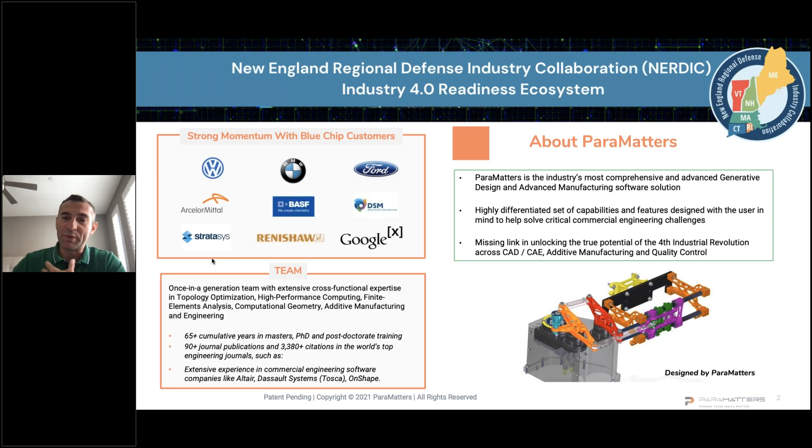And we really think that we bring the most comprehensive generative design solution on the market today. Just a few case studies on how our customers could leverage this technology: first of all, significant weight reduction, significant reduction of design cycles and time to market. And you can see that the technology allows generating lightweighted designs for nearly any material — it can be polymers, it can be metals, and various material properties.

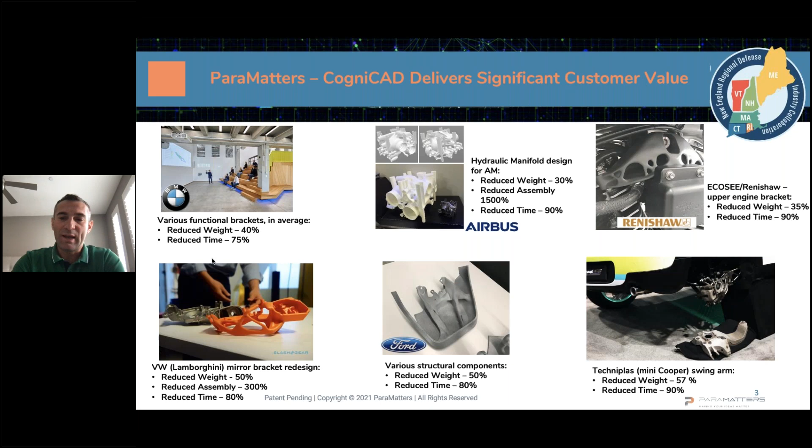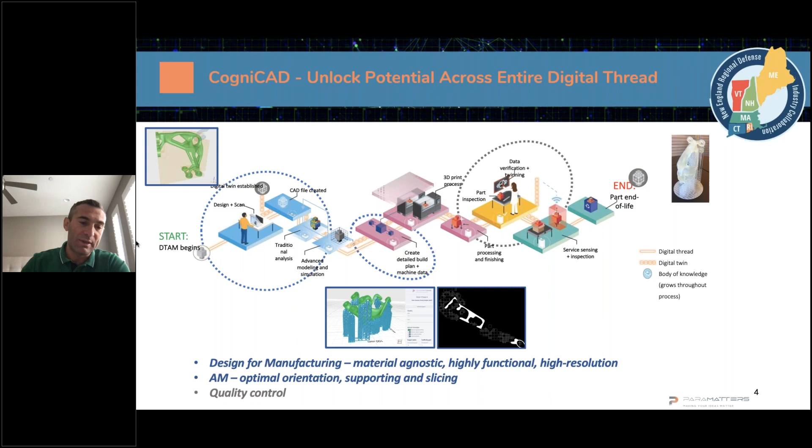Having the design, we need to prepare the design for manufacturing, meaning, depending on the technology, to find how to optimally orient the part, to generate support structures if needed, and to slice the model before sending it to manufacturing. Hence, instead of traditional CAD/CAM, we have stages of design for additive and preparation of the model for additive. And after the printing, the inspection part is also extremely important. In this presentation, I will mostly focus on the first stage, design for additive, and show what we can do, as well as our company's offering for preparation of the model for additive.

So now let's talk about generative design, what we are talking about today. What is design, right? In Wikipedia, if we look at the term 'industrial design,' it's basically creating part form prior to manufacturing. And if we talk about industrial functional design, especially for high performance parts, we need to make sure that this part is also physically viable — in engineering terms, physically viable. We also need to be sure that in terms of finite element analysis, the part can be viable.

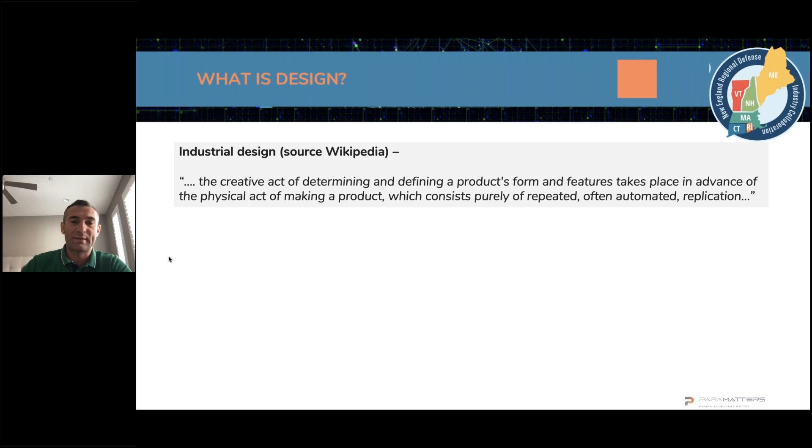And if we go to industry today — automotive, aerospace, defense, whatever industrial sector — and see how the engineering design cycle is built, typically two engineers are involved. The first one is what we call the CAD engineer, who is creating shapes based mostly on his intuition, using some CAD modeling.

And then he transfers this shape that he created based on his intuition, sending it to a finite element analyst, who has to mesh the model, apply loads, define material properties, and check, in terms of virtual physical tests, that the part doesn't break, right? We have to be sure that deformation, stresses, frequencies, and so on don't exceed the maximum limitation. Now, the design itself is done using CAD modeling, and CAD modeling is a lot of tedious operations based on primitives in CAD.

So we have to create a shape iteratively, then give it to analysts, and in many cases there is an iterative cycle of changing shape and analysis, and as a result, the design cycle is pretty long. It can take between 1 to 2 weeks for simple parts, up to months for complex design projects. And the process is very iterative, labor intensive, and also human centric. If we give the same design challenge to another team of engineers, they will probably come up with a slightly different design.

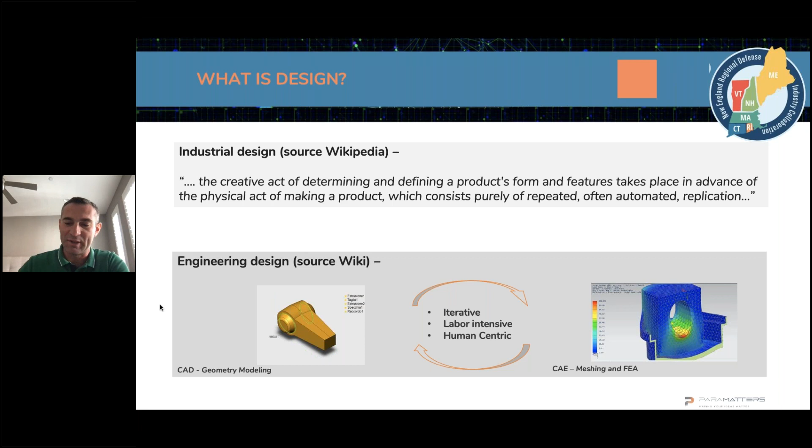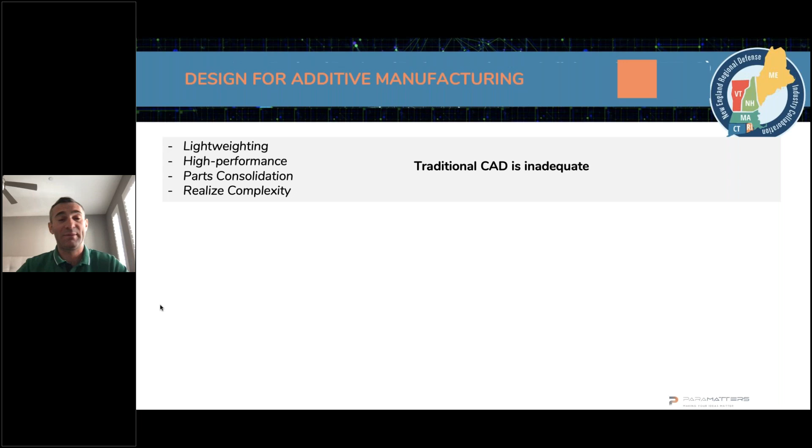What is generative design all about? In many cases, when we talk about generative design, it's related to additive, but not only. It can also be applied to traditional manufacturing. But for additive manufacturing, we need to understand that printing a design which was designed for traditional manufacturing doesn't make much sense. We need to leverage all the additive manufacturing advancements. Hence, we are able to consolidate parts, realize a lot of complexity, and generate much higher performance parts, and probably also lightweight.

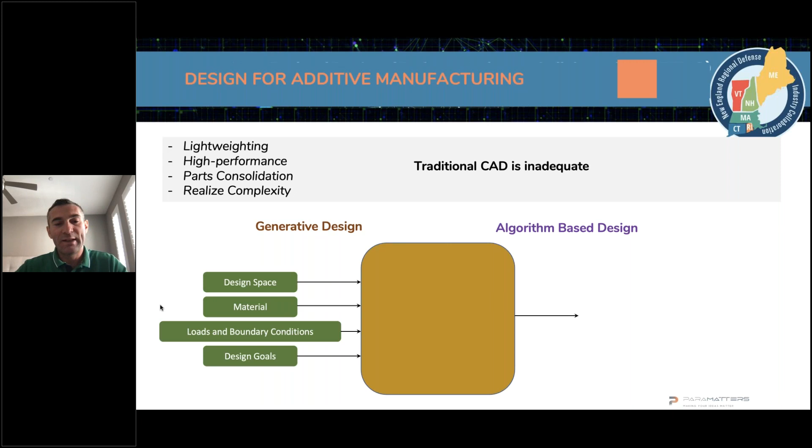And the technology behind it is what is called generative design. There are various definitions of what generative design really is. My personal definition is that it's algorithm-based design. We need to generate smart algorithms which can take into account all the constraints, so we are able to create viable geometry which can be manufactured and satisfies all physical constraints. Schematically: we need to define a working environment, what we call design space. Since the shape generation is based on physics, we also need to apply material properties, load boundary conditions, and design goals. And the algorithm should be able to generate a ready-to-manufacture model. That would be the ideal situation, right?

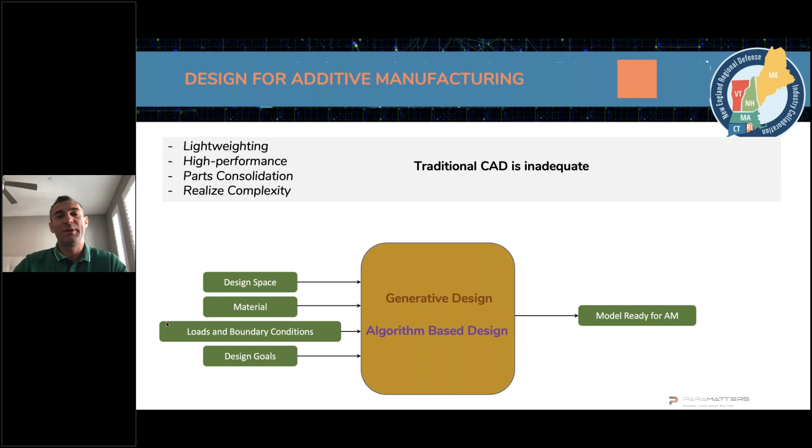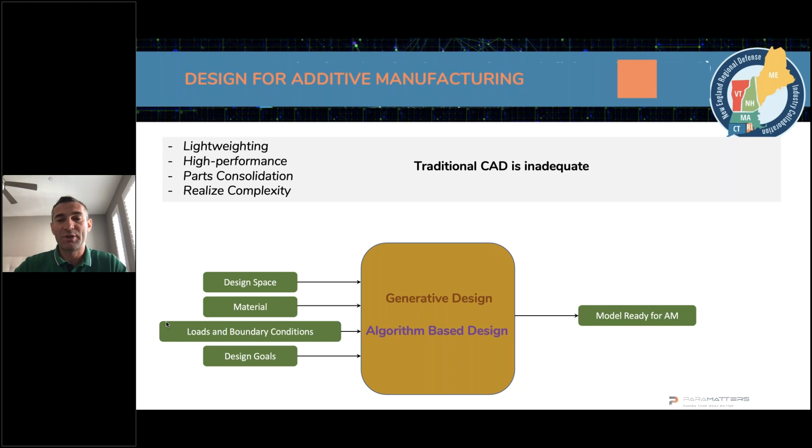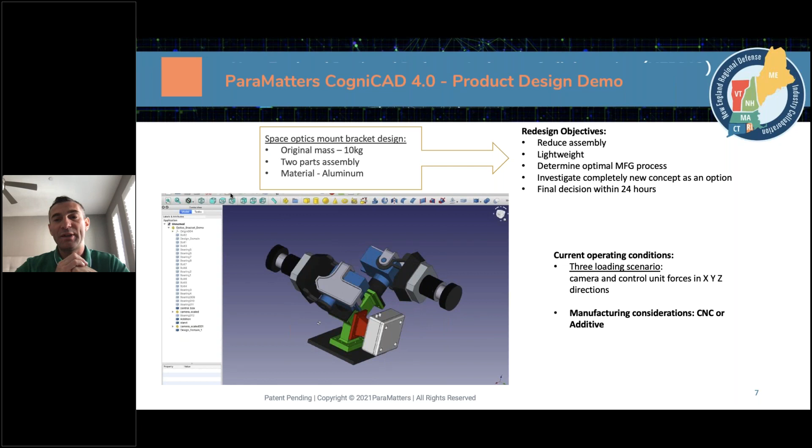And we talked about Industry 4.0, it's all about automation. We would like to automate these design processes as much as possible, to have as little manual, human interruption in the process as possible. I have an example here of a traditionally designed bracket. If we want to leverage additive, we can, for example, consolidate these 2 parts and consider this blue part as a design space. We define material properties here as aluminum. We defined loading conditions and manufacturing constraints as CNC milling and also as additive manufacturing.

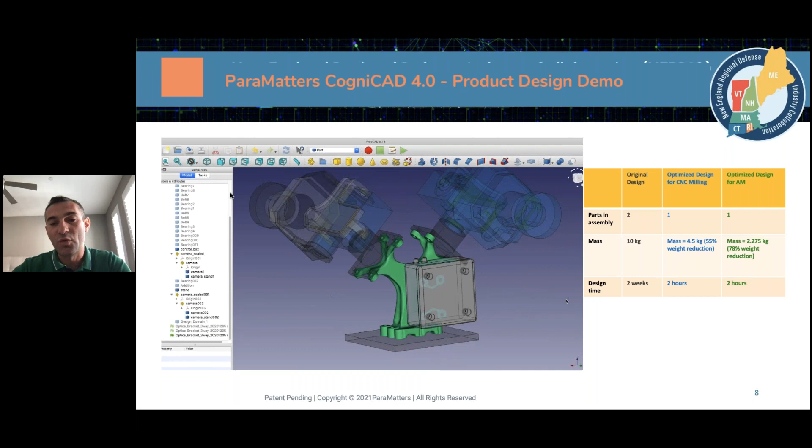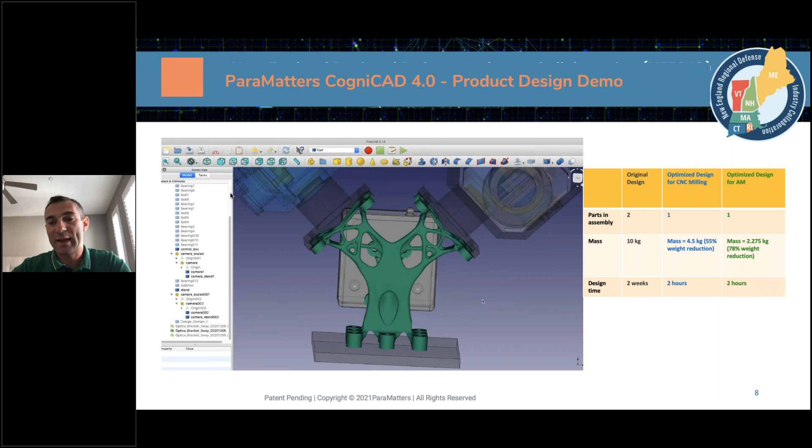And you see an example of how the software was able to fully automatically generate a design like this for CNC milling, and what you see now is for additive manufacturing. Of course, the part is much more complex, but we can achieve significant lightweighting and also assembly reduction, which also impacts the supply chain and overall manufacturing. So let's zoom in now on what generative design really is, how it works, and how we design problems.

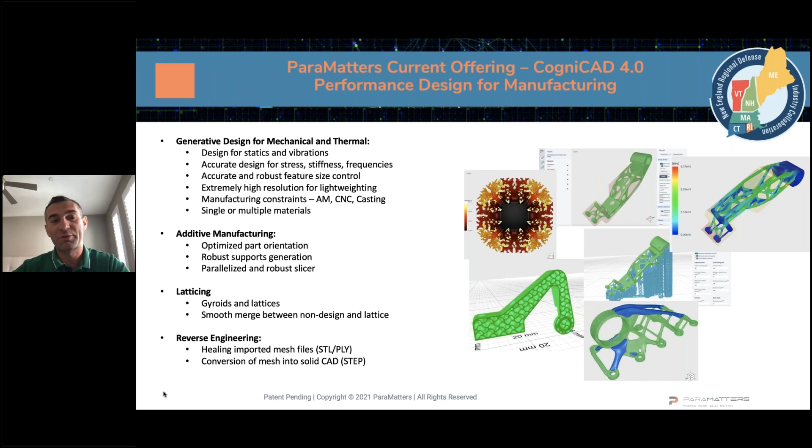Currently, our solution from ParaMatters, the company where we develop it, can take static and vibration problems into account. So beyond simple static loads, we can also take frequencies into account and control stresses, deformations, and stiffnesses in order to ensure very accurate manufacturing capabilities. We need to control feature sizes and also consider manufacturing technologies. Imagine how complex it is to create algorithms which take all of this into account. From here I would like to jump into the software and show generally how the flow works.

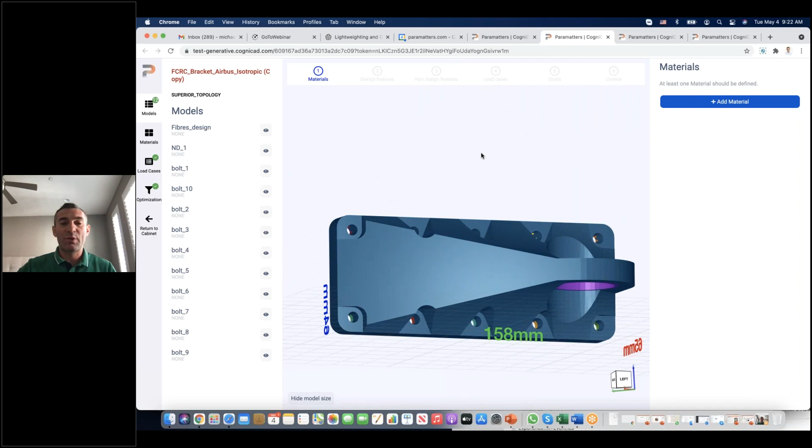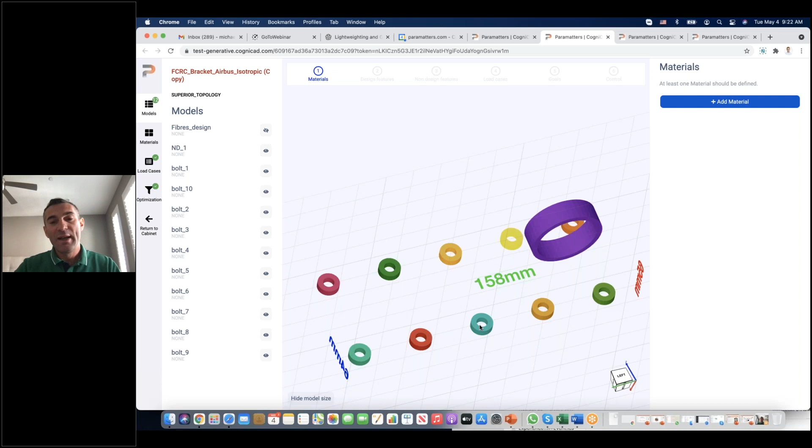What I'm showing is our software and how it looks in the GUI. Imagine we want to design a bracket like this. Actually, it's an Airbus bracket, and of course we want to lightweight it. So this is what we call the available design space. When designing this part, we need to keep some areas preserved, untouched. Each part that we design is part of the global assembly, and we need to make sure that interfaces stay intact and don't change. So ball bearing areas, some shafts or other areas should be preserved. What we basically ask from users is to create this design space in CAD and import this assembly into our platform.

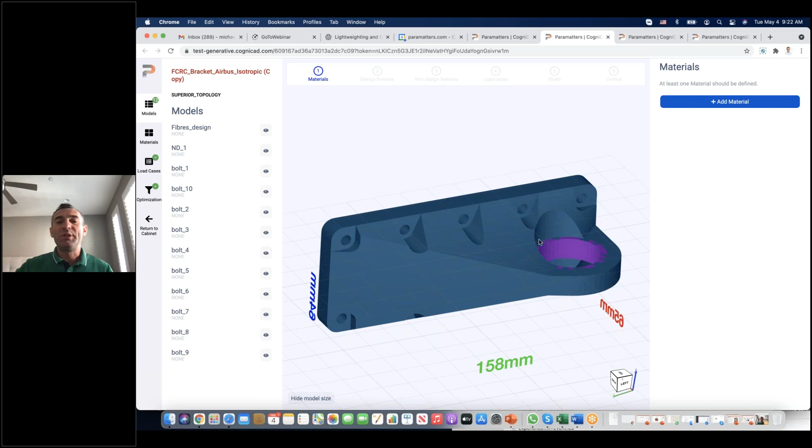So once you import this assembly into our platform, the flow is quite intuitive and easy to use. We also wanted to create this flow to be as intuitive as possible. So let's go together and try to define a problem. First, we have to define material properties. Let's assume this is aluminum, and we have material properties. If some material doesn't meet the user's expectation, you can always manually edit material properties.

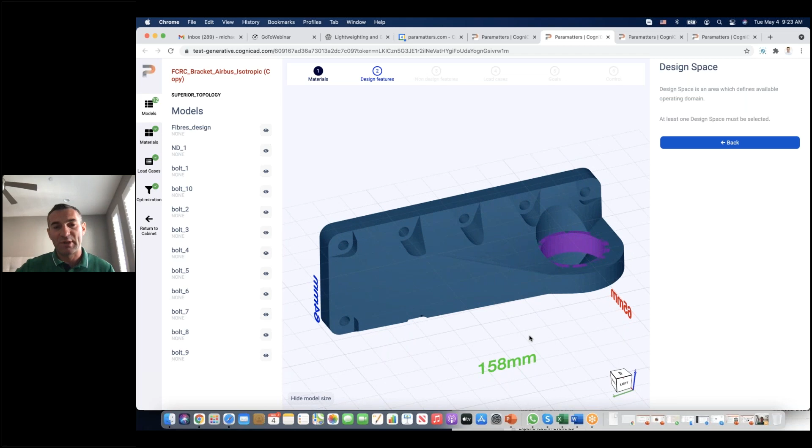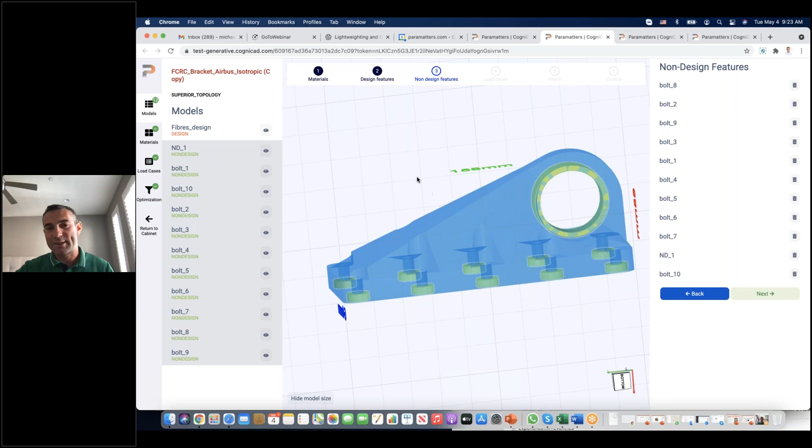Then, in the assembly that we imported, we need to classify, to tell the algorithm what is the design space, right? So this is our design space, and what we call non-design features: the areas that should be preserved untouched by the algorithm. So basically everything which we define as non-design will be intact, unchanged, and the design should be created within the design space area. It cannot exceed the other areas. So these are the constraints of the design problem.

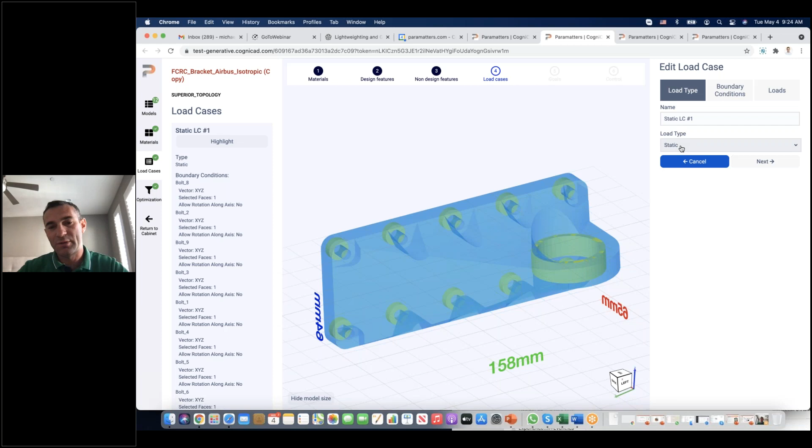Then we need to define design loading cases. I have already predefined ones, but we can quickly go through. So having static or vibration load cases, vibration meaning we will have to create non-structural masses and boundary conditions and say that we would like to have vibration problems. In static load cases, the user can specify what we call boundary conditions, how the part is fixed against movement. So by default, each part or face is fixed against XYZ.

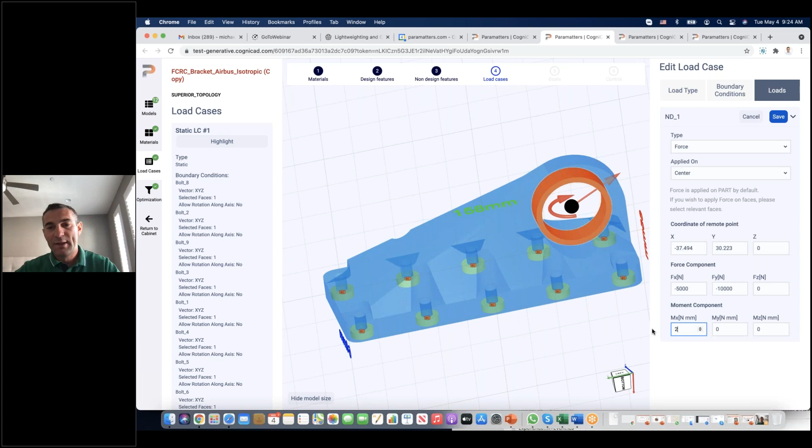And we have to apply loads. So users can define loads, moments, pressure, acceleration. Actually very relevant for the defense industry, a lot of acceleration loading cases. And users can define many load cases. I have predefined two load cases here, but typically there can be an unlimited number of load cases. Of course, from a design efficiency point of view, only necessary load cases should be considered.

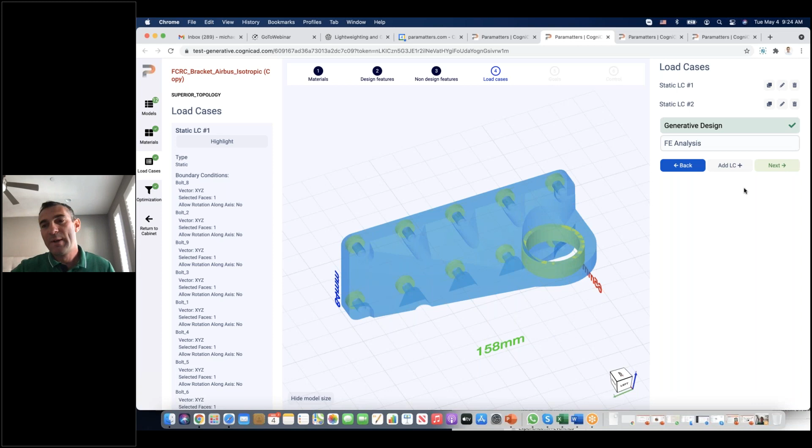So having defined this, we need to tell what's the goal of the design. And we have several definitions. For vibration load cases, typically users want to maximize fundamental frequencies. For static load cases, users want to maximize stiffness. Maximizing stiffness in engineering means minimizing compliance, keeping some given amount of material. So meaning we would like to remove 90% of material and use only 10% of material to have the stiffest possible structure. An alternative formulation can be, we want to minimize the mass of the part, keeping stresses within the right range.

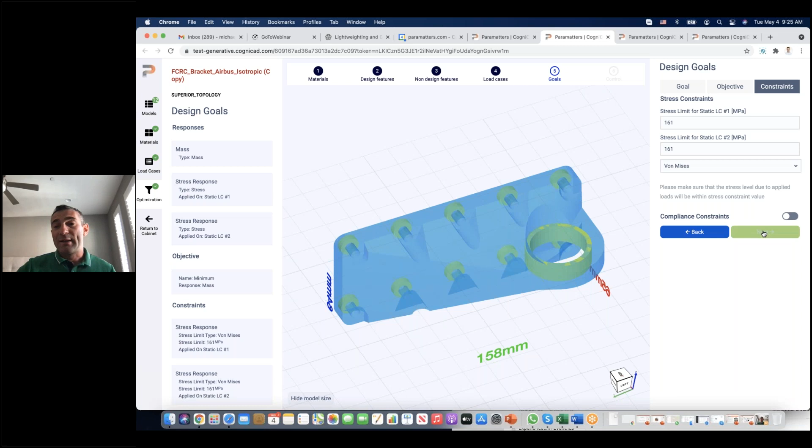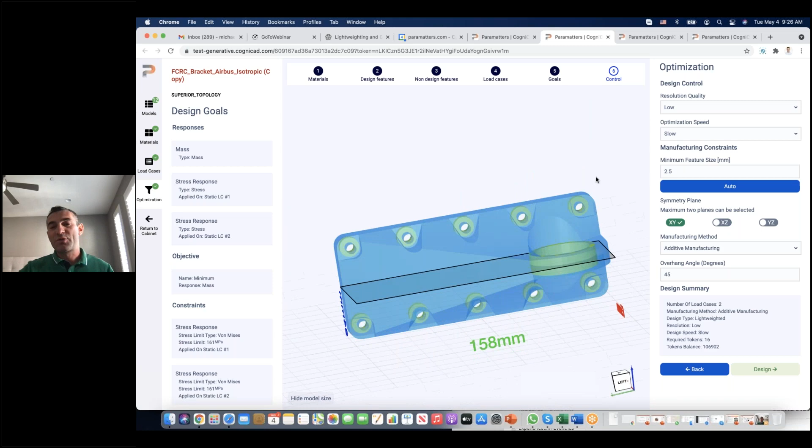And the last step is to define finite element resolution and feature size control, right? If we want to manufacture it using some given technology and we want the minimum feature size to be 2.5 millimeters, for instance, we can control it. Then users can define a symmetry plane if we want. So if users would like the final design to be completely symmetric, there is a way to enforce symmetry. And we can define manufacturing methods.

Additive manufacturing, or if it's milling, users can specify if it's 3-axis milling or 5-axis milling, and they can even define the direction of the milling, and it will apply an additional geometrical constraint to the final design. And typically, that's all. Users can just click the button design, and it will be running.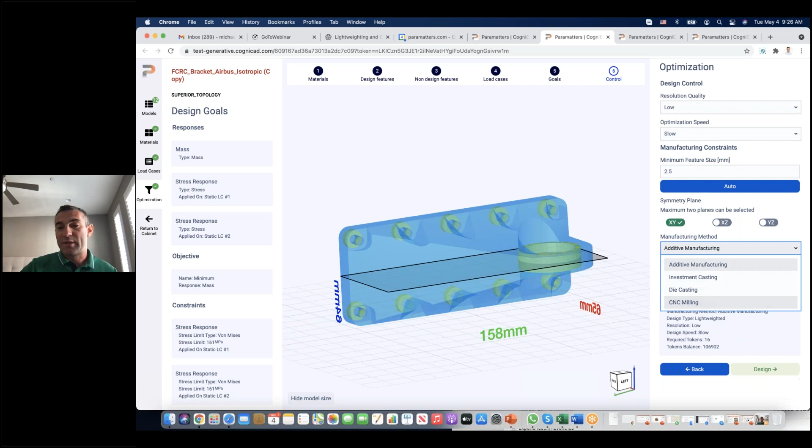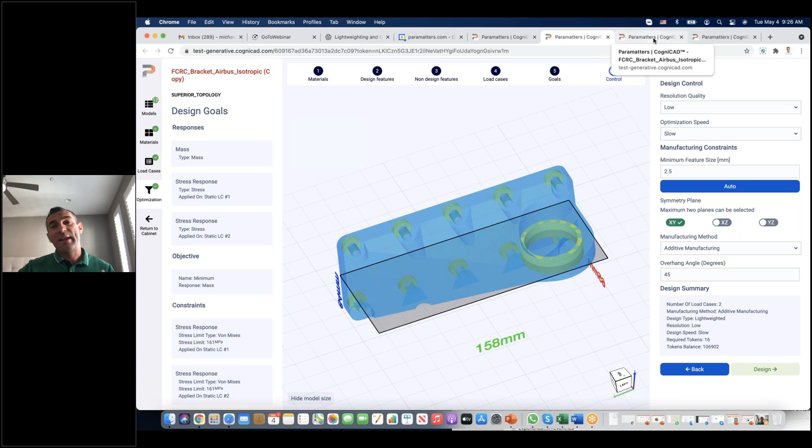We leverage cloud computing because typically this part will be meshed, finite element analysis will be running repeatedly, and the optimization algorithm will redistribute materials accurately such that it satisfies all the constraints. It takes between 25 minutes up to a few hours, depending on the complexity. And the software is able to generate, fully automatically, a very smooth, watertight, and ready to manufacture design. You can see the ghosted was the original part. The green is the optimized design.

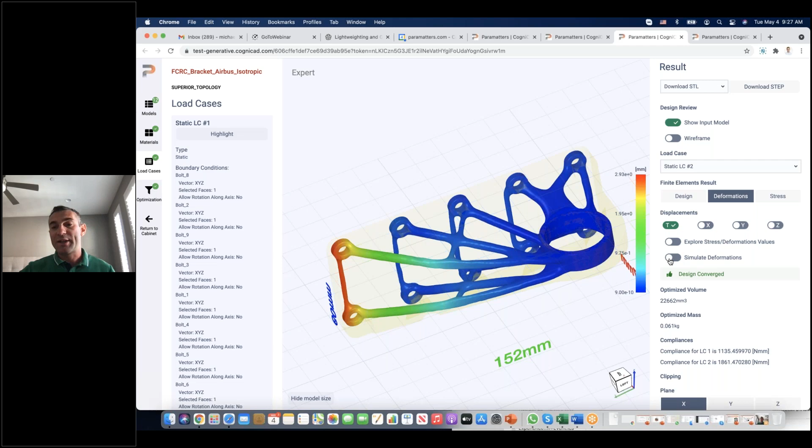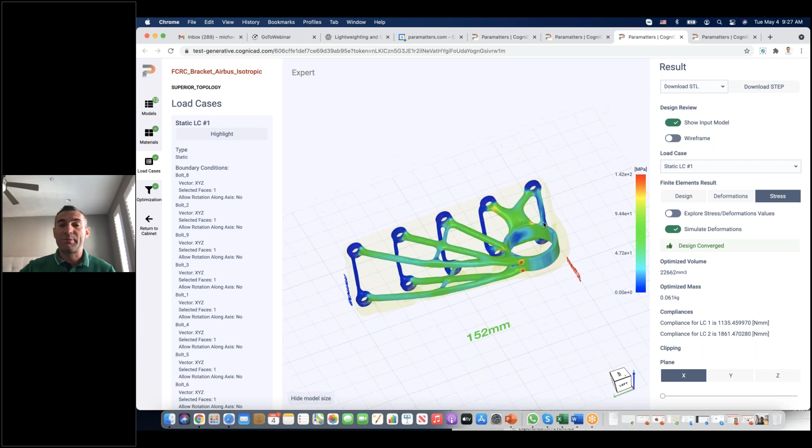Of course, it's not just a nice shape, it's backed by finite element analysis, including deformations and stresses. And if all the physical requirements are good, satisfying the designer's requirements, you can just download the file in STL format or STEP format, and it can be ready for further manufacturing. If you want to reevaluate this using another FEA package, it's also possible. And this is for static load cases.

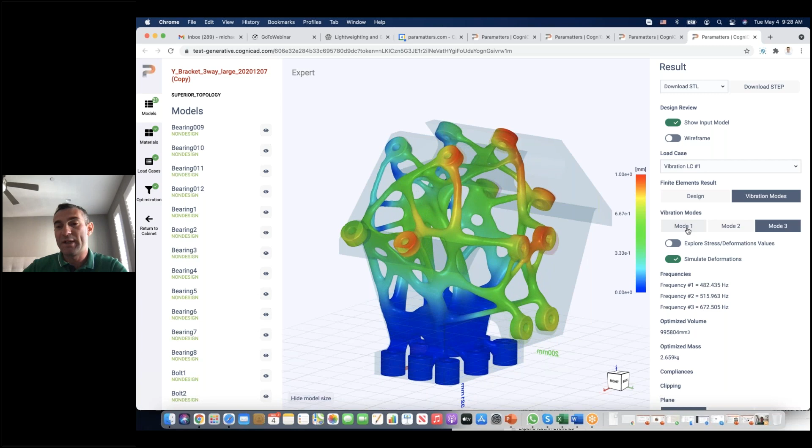I have just another example. It's a different example, but it shows you what can be achieved for vibration load cases when we wanted to maximize frequencies of the part, and it can show the first 3 modes and frequency values of the part. So it can really design for statics and for vibrations. And again, all these complex shapes were generated by the software fully automatically. You can imagine how long it would take for an engineer to even get close to this design.

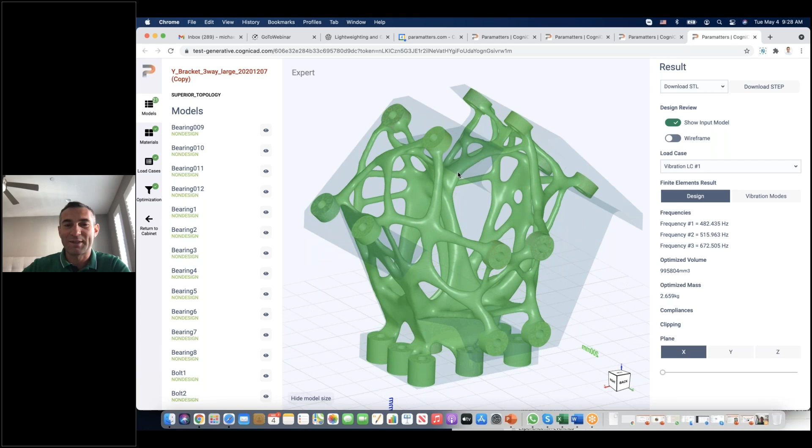Based on intuition, it's very difficult to know exactly where to put material, and even knowing material just to generate a shape like this will take probably months, while software is able to generate these designs within tens of minutes up to a few hours fully automatically. This is what generative design is all about. And you can create several candidates and go from concept to final part and prototyping extremely quickly.

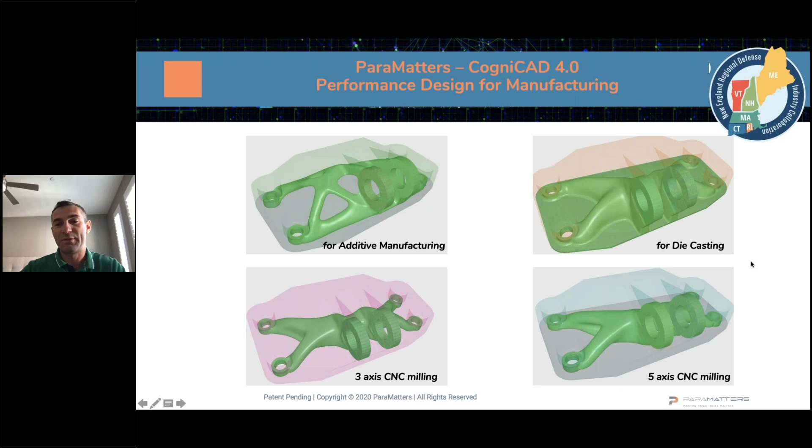And just to show you how design for additive would look versus design for die casting, and versus design for CNC milling, 3 and 5-axis milling. So applying different manufacturing constraints for the same design problem, of course, will end up with a different shape. This is basically what generative design is about. Now, in a few slides, I would like to show a few real case studies that we have had with our customers, only those which we can present.

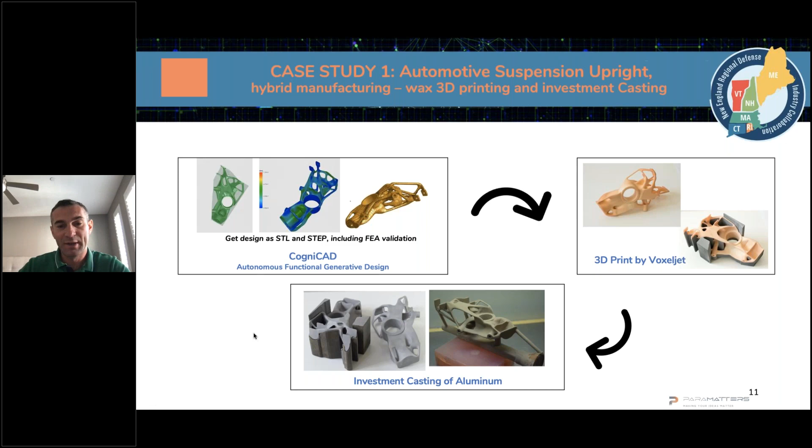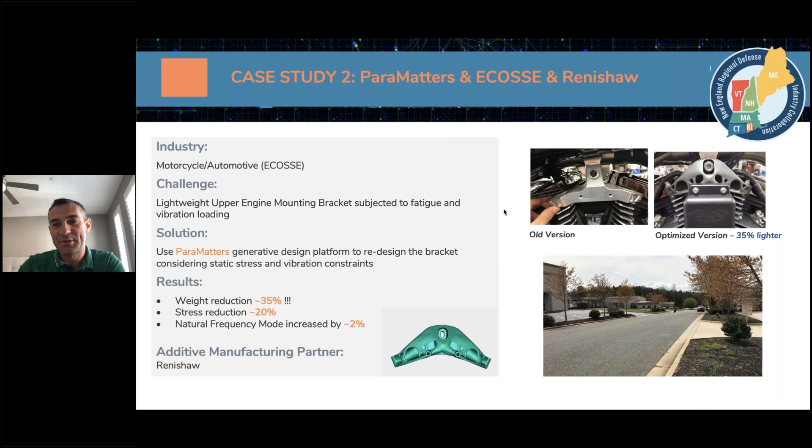Another case study that we had actually shows that it's not about creating cool, nice looking organic shapes. This is all about creating really lightweighted and high performance structures. This project was our first project, about 4 years ago, with a customized motorcycle company, where the original bracket was lightweighted. So basically we completely redesigned this bracket. We were able to reduce weight by 35%, reduce stresses, and also slightly increase the fundamental frequency of the part.

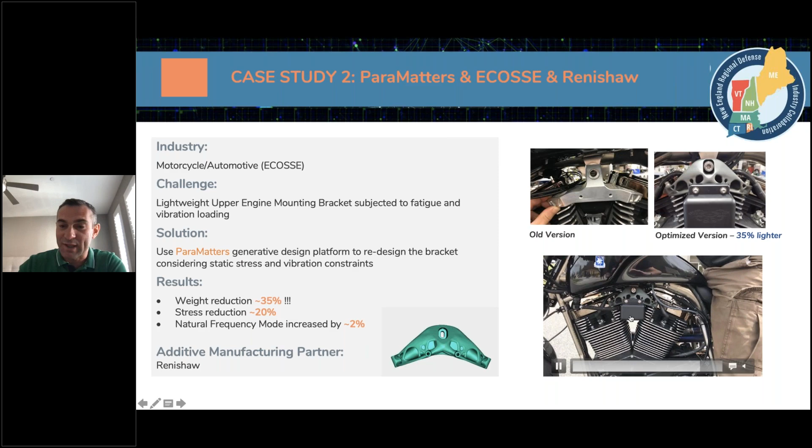And I don't know if you can see the video running here. The part is inside the motorcycle. You can see it applies some vibration load cases, and it's working. It's not just nice looking shapes. It works.

Another very nice case study we have is with Arcimoto. It's an urban lightweight electric vehicle company, which had the freedom to redesign many components completely from scratch. With their engineers using our software, they were able to lightweight and consolidate many parts. And the beauty of this: 2 engineers within 6 days were able to redesign 7 parts, which later on were sent for additive manufacturing and investment casting.

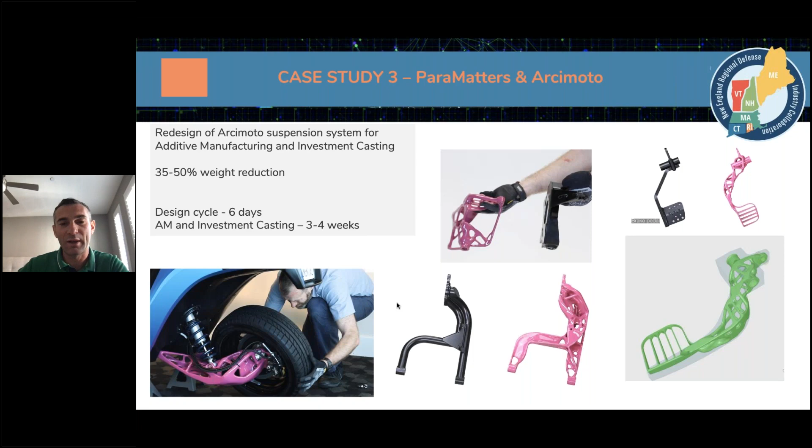And the whole project took about a month. It's unimaginable that a suspension system could be redesigned and manufactured within such a short time. So the ability to automate and iterate quickly allows us to create these incredible results.

And a little more advanced design. Airbus, who's one of our customers, was able to run a few cases. We cannot show everything, but for this manifold, they allowed us to show. So basically, the original manifold was just a block of material with many channels. Additive allows creating smooth channels, which improve the flow.

At the same time, it creates a very complex assembly. So the idea here was to consolidate all this assembly into a single part, and we needed to go to extremely high resolution to allow this complex design to be manufactured. So this is basically what we can achieve.

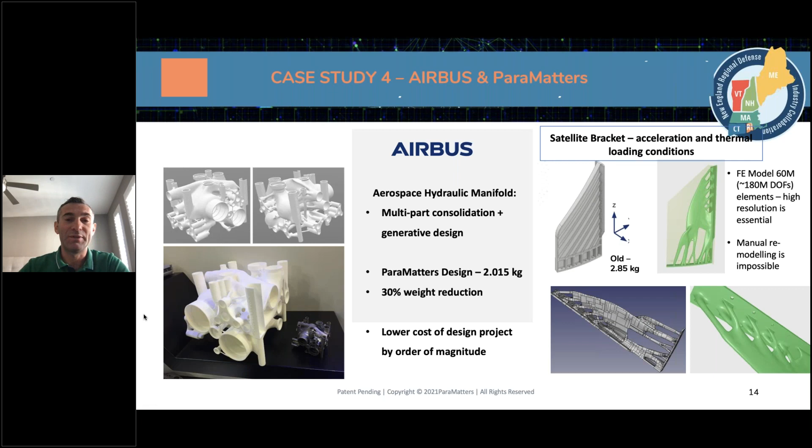Jim, let's move a little, maybe zoom out a little bit again.

And when we talk about Industry 4.0 and digital manufacturing, how different is it from traditional manufacturing? In traditional manufacturing, typically we buy material, we design for this material, and it goes to manufacturing. The difference with additive is that you can buy your raw material, but while printing, by tuning machine parameters, you can get totally different material properties in the end.

And depending on the additive manufacturing technology and machine parameters, we can have completely anisotropic material behavior while thinking that the material will be isotropic. Just to explain, an isotropic material is a material which has the same properties in all directions. For instance, cast metal is isotropic, right? Composite structures are anisotropic because they have directional stiffness. And in additive manufacturing, depending on the technology, we can have different material properties.

So this triangle between materials, machines, and software is extremely important. And you can see in the domain, especially for additive, there are a lot of partnerships. So we as a company, ParaMatters, partner with material companies as well as machine companies, and it gives us access to a lot of material data, plus the advancements and insights of the manufacturing technologies, which allows us to develop very sophisticated algorithms which can take all these different material properties into account.

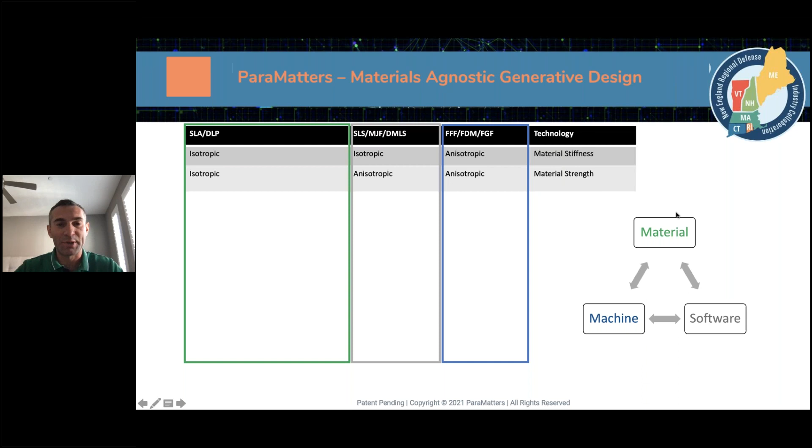Most solutions on the market today can handle generative design only for isotropic material properties, while we as a company expanded it beyond isotropic towards anisotropic. For example, powder-based technologies have isotropic stiffness, but in terms of strength, the material is completely anisotropic.

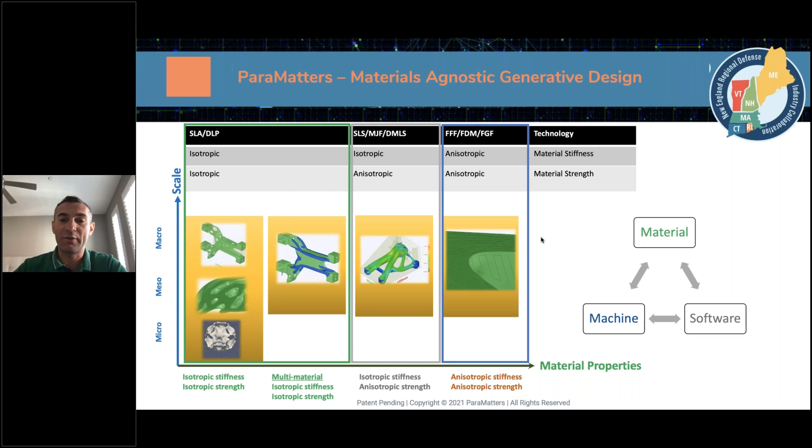Looking into composite structures, printed composites, or FDM and FFF technologies, it's very popular today to print polymer reinforced with carbon fibers. They exhibit anisotropic material properties, and I believe most of the audience here from the defense industry is probably exposed to composite structures. So having software that's able to design accurately for anisotropy, including finding the optimal material orientation, is extremely important.

Let me explain this again. With FFF or FDM technology, putting material in a given orientation creates a situation where direction 1 is much stiffer than 2 and 3, and even doing tests, we can see the differences. Having software that takes into account and finds the optimal material distribution as well as optimal material orientation is important.

I don't know if you can see here, there's the toolpath of optimal material placement. I can show it a little more. This is extremely important, and that's what the software we developed does.

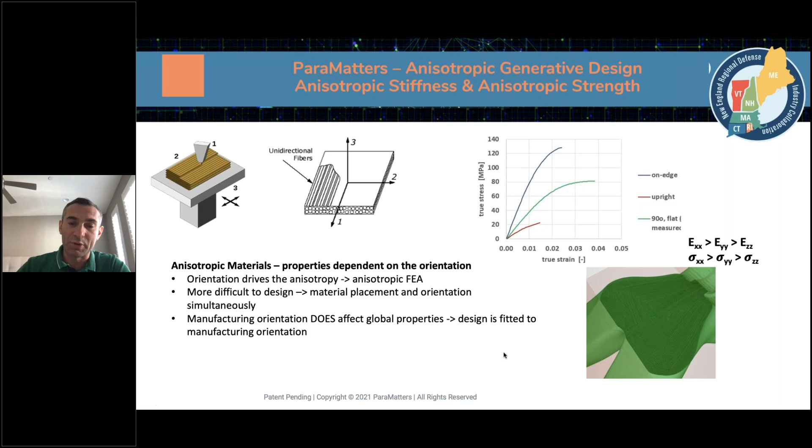The problem definition is very similar to what we presented, except material properties are fully anisotropic. Before the manufacturing stage, the user can also define G-code parameters. So the software is able to find the optimal material orientation and export the model as STL or STEP file geometry, including the G-code, which has exact information of the material orientation. It's very valuable and important.

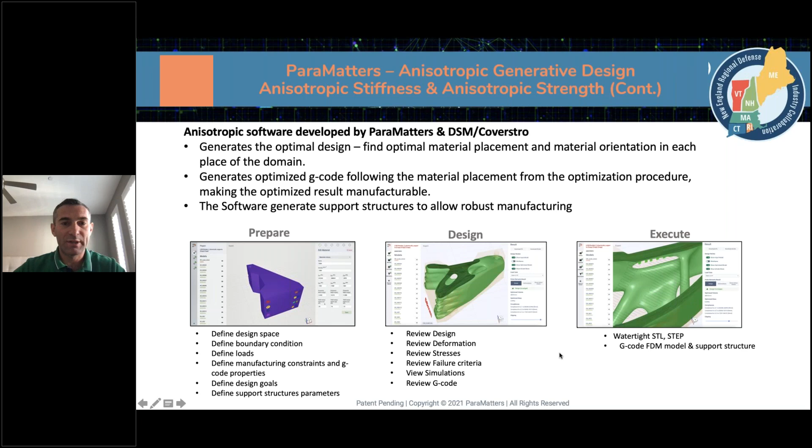Let me close one of those, and I'll show one of the examples of how designs may look with fully anisotropic material properties. I think we're running a little bit out of time, so a few more minutes and I'll probably move to the Q&A session.

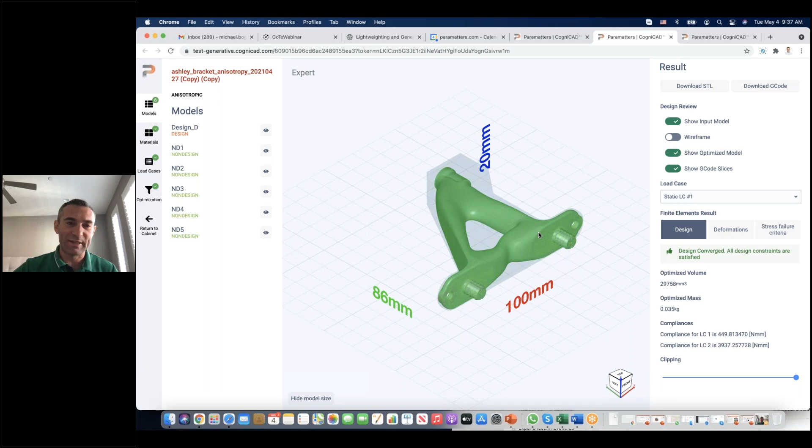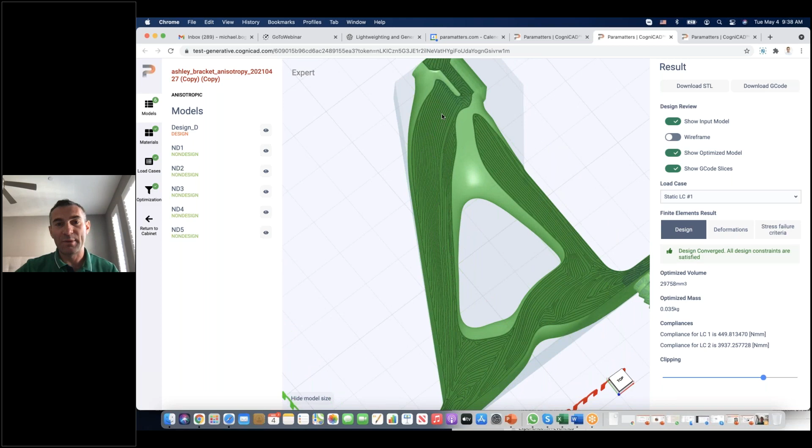It's probably a different example, but it doesn't matter. Here the assumption is that the part is printed in XY orientation and Z, layer by layer. If we look inside, we can see that the software is able to find the optimal material orientation and fiber orientation, which has extremely important information inside.

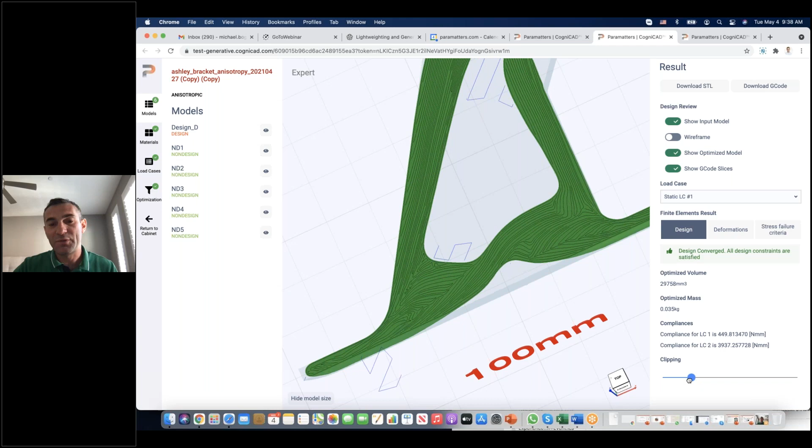The software right now is in beta testing with beta customers at big aerospace companies, and so far we're getting very good feedback. They successfully printed a few parts, and it's in physical testing right now. So beyond finding optimal orientation, we also find the optimal placement of material, and the orientation as well.

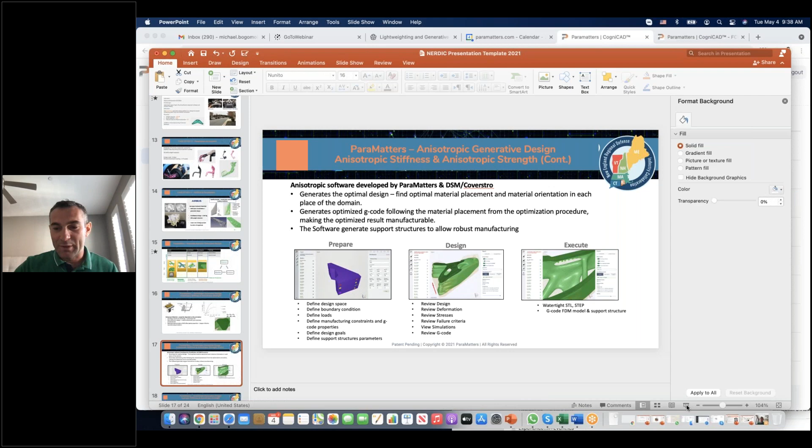I'll go back to the presentation. Talking about powder-based technologies, which are isotropic in stiffness, if we print the part like this or sideways, we'll exhibit different stresses in different directions because Z is oriented differently. So the final design will be slightly different, and the software is able to take into account not only stiffness but also strength in terms of orientation.

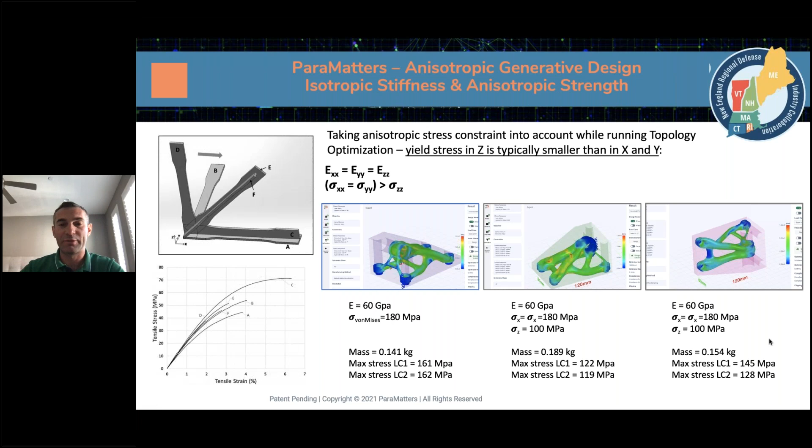In a few words, moving from design to manufacturing depends on what technology we're trying to use. If we're using stereolithography, for instance, we need to find how to optimally orient the part, generate support structures, and slice the model to prepare it for printing. Our software also allows generation of support structures and slicing.

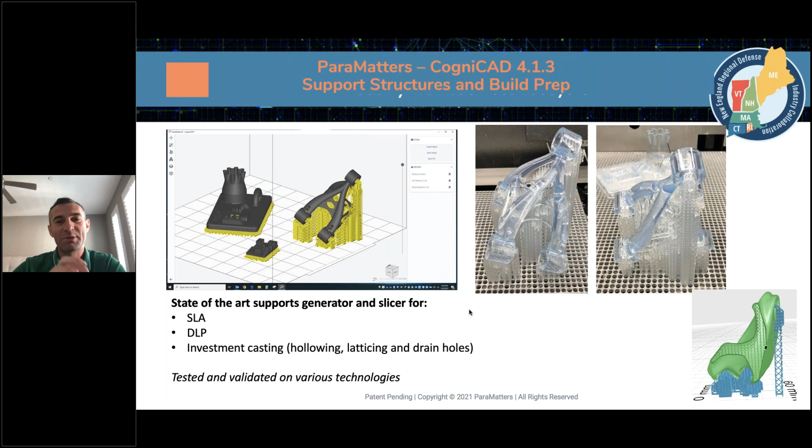Basically, like traditional CAD-CAM today can be done very effectively and automatically on our platform in terms of creating designs and preparing the model for manufacturing as well. Today we can take it even further, just a glimpse of what additionally can be done in aerospace technology, and I believe also in defense.

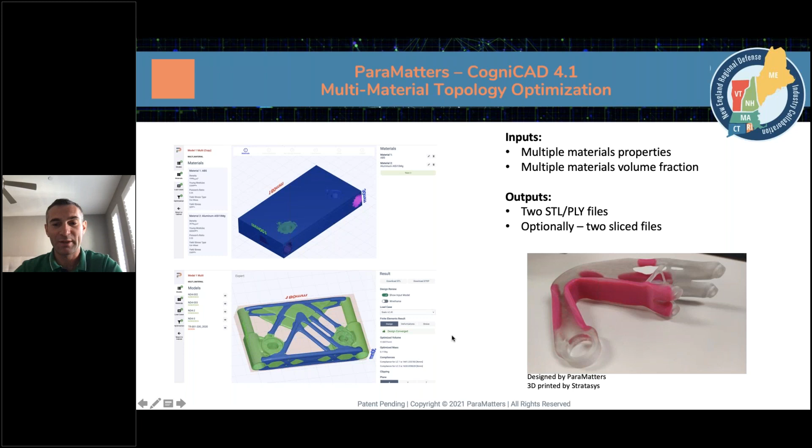Sandwich structures are very popular, or multi-material designs. Today additive manufacturing can take us into multi-material printing. Keep in mind that generative design also allows us to find the optimal distribution of several materials, having multi-material design as well. This can be manufactured using Stratasys and other additive manufacturing technologies.

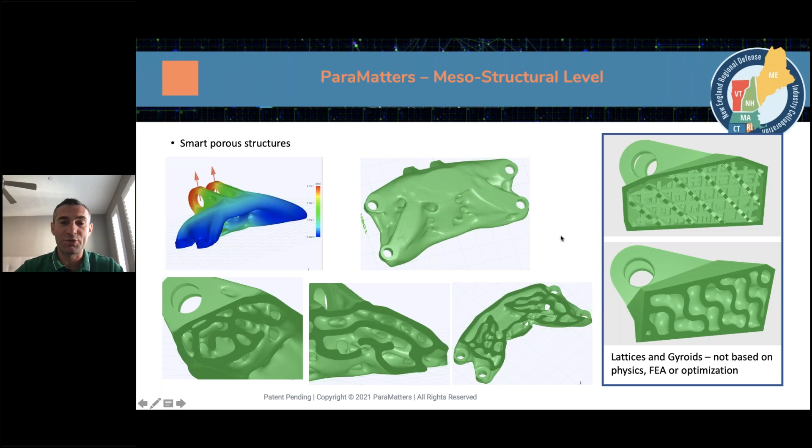You probably could see that the lattice structures concept is also quite popular today. Frankly speaking, lattice is less effective structurally than topology-optimized, generatively designed structures. But keep in mind that this software allows also generating these effective structures as well.

We can take it even further beyond global optimization, towards what we call mesostructural optimization. Instead of having just a periodic lattice unit cell, we can find microstructural material distribution, which becomes much more effective than a typical lattice. I was maybe running a little too fast, but I think I'll stop here. It was an overview of what generative design can do.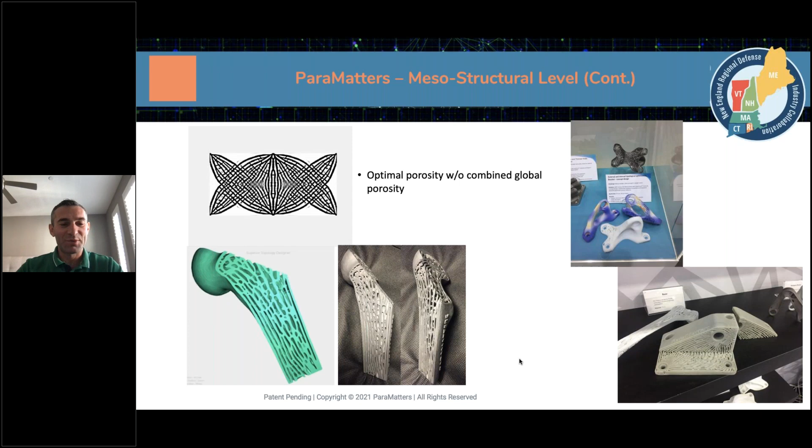It's very, I would say, exciting. I would also say quite complex, but we wanted to simplify it to make it accessible for users and to create a very accessible workflow, including friendly UI. I'm happy to answer any questions, and here we are.